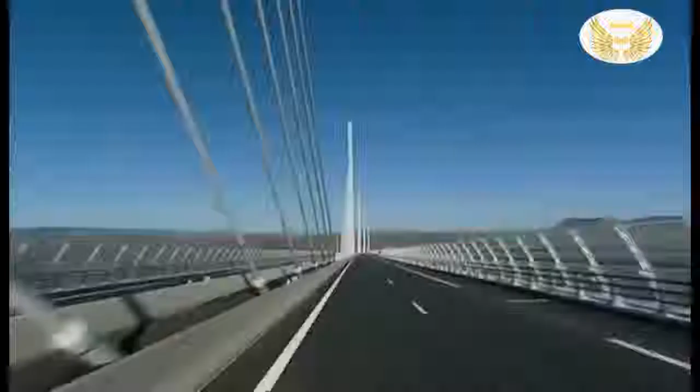This is the Millau Viaduct, the tallest bridge in the world. Its highest tower stretches a staggering 343 meters. So high, the bridge glides above the clouds. But this is a megastructure they said couldn't be built. When I've shown first the drawing of this bridge, they really thought I was crazy.

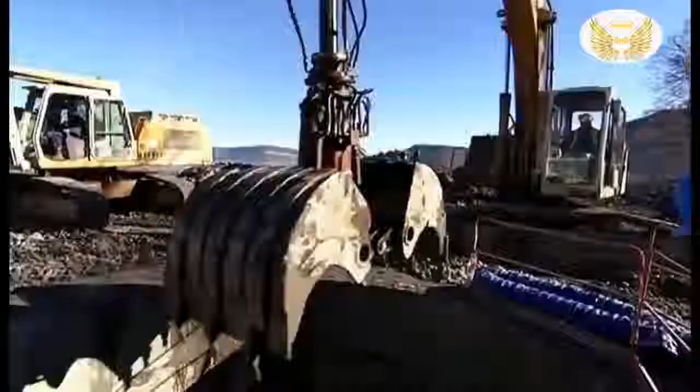The team attempting to build this amazing freeway in the sky had to survive landslides, fight winds gusting at 130 kilometers an hour, and weather massive storms as the bridge simply hung in the balance. It's a bridge that pushes the boundaries of engineering to the limits, and then beyond.

Imagine building a series of Eiffel Towers, then slinging a 4-lane highway between them, all the way across one of the deepest valleys in France. Impossible though it sounds, that pretty much describes the building of the Millau Viaduct.

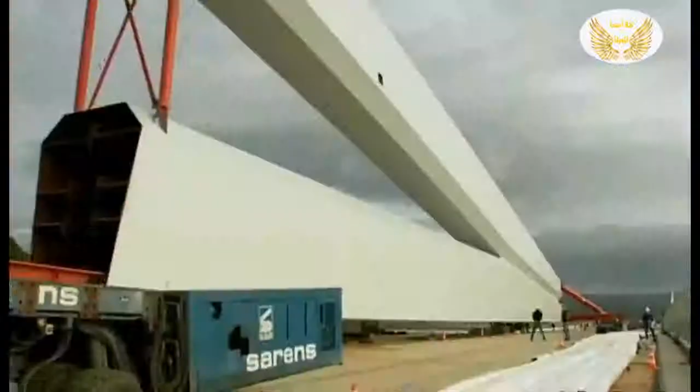From the start, the construction team faced 3 daunting challenges. 1. Build the tallest bridge piers in the world. 2. Put a 36,000-ton freeway on top of them. And 3. Erect 7 steel pylons, each weighing 700 tons.

And what's more, they had to do this hundreds of meters above solid ground. So high that if you were on top of the Eiffel Tower, you'd still be looking up at this awesome bridge.

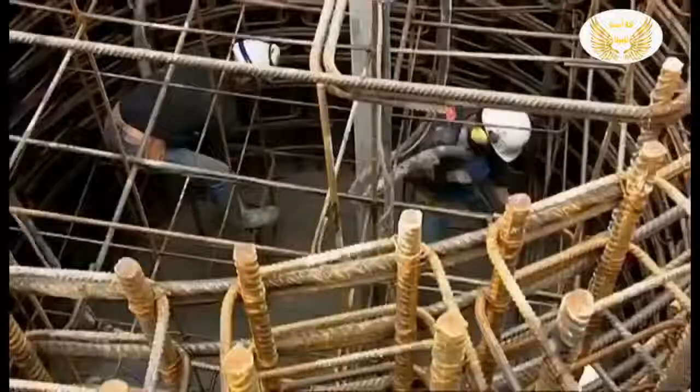October 2001, the team break ground. They're required to build a bridge that'll last for 120 years. And to win the contract, the teams promised to build it in record time, less than 4 years. By comparison, the world's longest suspension bridge, the Akashi Kaikyo in Japan, took a full 10 years to build.

To up the ante, any delay will cost them $30,000 a day in penalties. There are 7 piers that are numbered from the northern end of the valley. Number 1 will pose problems because of the steep slope. Number 2 will be the biggest challenge since it's the tallest. Crossing the river, number 3 is not much shorter. Then 4, 5, 6, and 7 climb the gentler slope to the south.

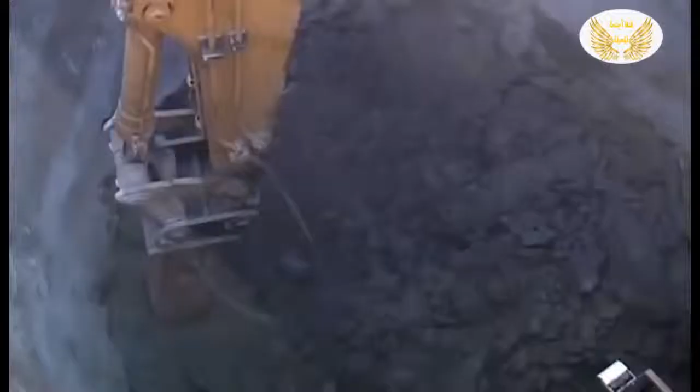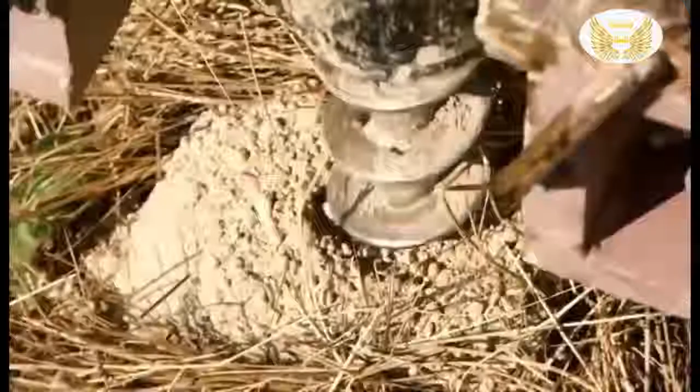To begin, the team had to bury the foundations deep in the bedrock in order to support the enormous weight the bridge will place on them. But the forces of nature were stacked against them. Geologists have warned of the risks posed by the region's fractured limestone. The rock is full of cavities that are essential to the local cheese economy.

These cave systems, close to Millau, are home to a unique bacteria responsible for the blue mold in the world-famous Roquefort cheese. But what's perfect for cheese could be disastrous for a megastructure. The geologist's diagnosis spelt one thing: landslides. This kind of catastrophe could jeopardize the entire project. Despite the warnings, building went ahead as planned.

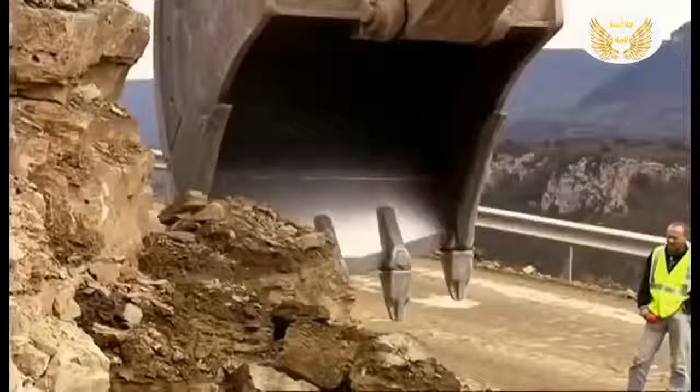Then, well into construction, as predicted, a dramatic storm causes a landslide. 4,000 cubic meters of rock collapse around Pier 1. Fortunately, the fallen rock doesn't damage the pier, but the warning is clear. They're forced to divert precious manpower and equipment to stabilize the slope and prevent a repeat collapse.

So if the area is prone to landslides, why did they build the world's tallest bridge here in the first place? The answer is simple. In the 1980s, France built a freeway linking Paris directly with Spain. This major artery headed south across the French countryside, while from the Mediterranean, the freeway headed north, until they both hit one of the deepest valleys in France and stopped dead.

Welcome to Millau, France's least favorite bottleneck. The town of Millau is in the mountainous region of the Massif Central, one of the most tranquil parts of France. But in summer, this poor medieval town suffered traffic hell. The locals couldn't take it anymore. Neither could their mayor. It was terrible for our reputation. When you hear every day on the television and radio, avoid Millau, there's a traffic backup, a 5-hour wait in Millau.

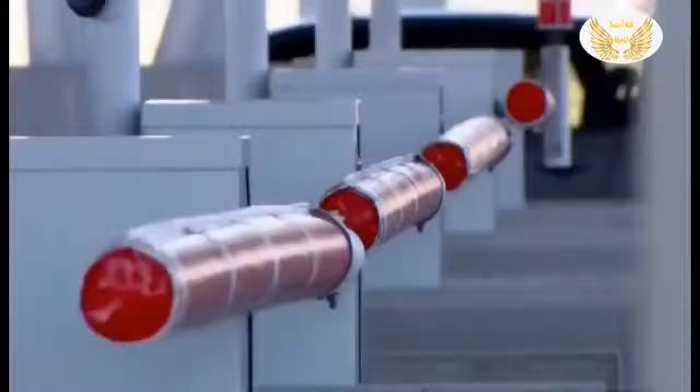Car 22 then has the long haul up the other side of the valley. The final timing is a staggering 1 hour and 35 minutes. Over an hour longer than Jamila, who took the freeway and bridge. It's clear exactly why the bridge was needed, but it took the French government a very long time to get round to building it.

12 years before construction began, up in Paris, the Ministry of Transport first came up with a plan. Their head bridge builder, Michel Virlogeux, is no ordinary engineer. He's a man who thinks big, very big, like the Normandy Bridge in northern France, the longest cable-stayed span in the world. With this record-breaking structure completed, Virlogeux was on to his next, Millau. His plan, another cable-stay bridge, but pushing the technology beyond anything previously attempted, with piers 4 times higher than the Normandy Bridge.

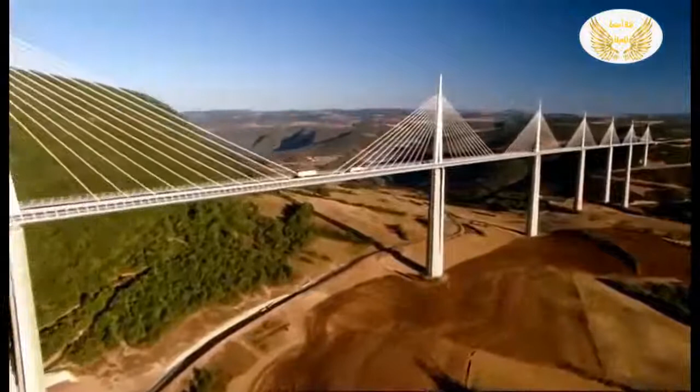The Millau Bridge would not only be the world's tallest, it would be unlike any bridge ever constructed. When I first showed the drawing of this bridge to the government authorities, they really thought I was crazy. Virlogeux's Normandy Bridge has 2 sets of cables supporting the deck. But he wanted to up the stakes for Millau by losing 1 row of cables, so the remaining line would be forced to do twice the work.

More dramatically, the 2.5-kilometer Millau Bridge, instead of having a single main span, needed a whole series of piers to support it across the valley. No bridge builders had ever attempted a multiple-span, single-line cable-stay bridge on this scale before. The French authorities had a problem. Nervous about Virlogeux's groundbreaking scheme, they held a competition inviting other engineers and architects to compete with different designs.

The winner, Lord Norman Foster, is one of the world's superstar architects. In Hong Kong, he built the world's largest airport terminal. In Barcelona, offices literally hang from a mast on his communications tower. This is a man who regularly contemplates the impossible and delivers. You know, it's the challenges, and it's one challenge on top of another, on top of another.

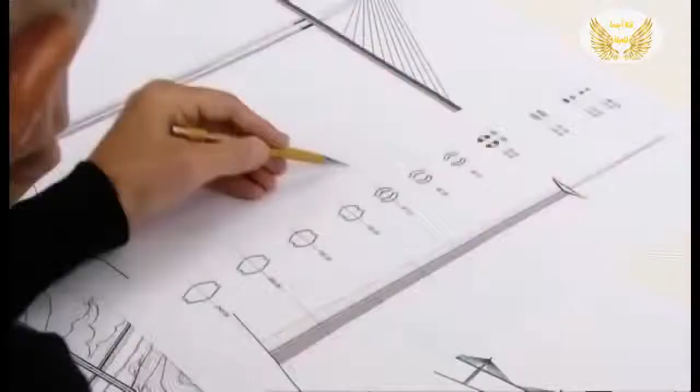Ironically, Foster's answer was to take Virlogeux's pioneering scheme, then push it one stage further. He turned an elegant piece of engineering into a delicate work of art by boldly cutting out 2 of the 9 original piers and seriously slimming down the remaining piers and road deck. Foster wanted the bridge to appear as delicate as a butterfly, but this butterfly has to support the weight of 5 Eiffel Towers in gale-force winds hundreds of meters above the River Tarn. Getting the design wrong would be a disaster.

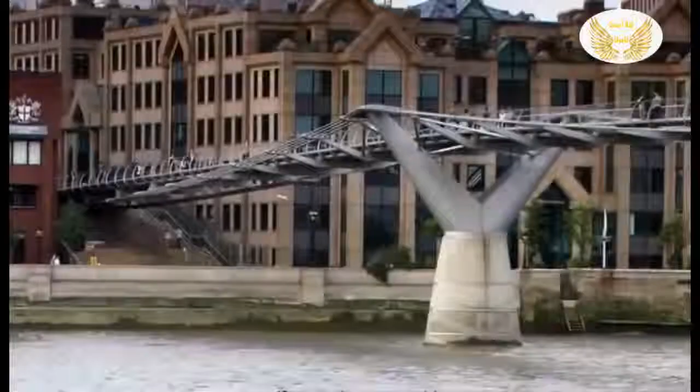Then, with Millau still on the drawing board, Foster's record as a bridge builder suffered a major setback. His Millennium Bridge in London is actually another record-breaking structure, the lowest profile suspension bridge in the world. But when this footbridge opened to the public in June 2000, it was a public relations disaster. Crowds walking over it set up a resonant frequency, and the bridge began to sway. As people adjusted their step to the small initial wobble, the effect was magnified.

Though it didn't threaten the structure, the swinging motion became so dramatic, the authorities closed the bridge for a refit that took 1.5 years and ended up costing over $8 million. It was a bad omen for the Millau Bridge, where construction was soon to begin. And at 15 times the height, a design flaw would be a catastrophe.

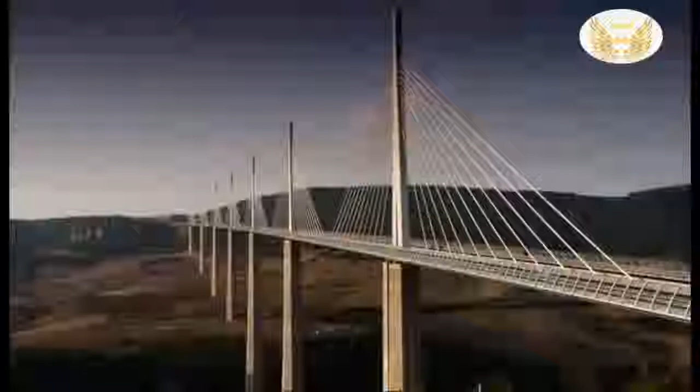December 2001, France's Millau Viaduct, the tallest bridge in the world, is under construction. Everything about this project is supersized. It'll need 200,000 tons of concrete, so much that the team have to build a concrete factory on site. But there's nothing straightforward about this concrete. The formula must be just right. It needs structural strength to support the massive loads it'll have to bear.

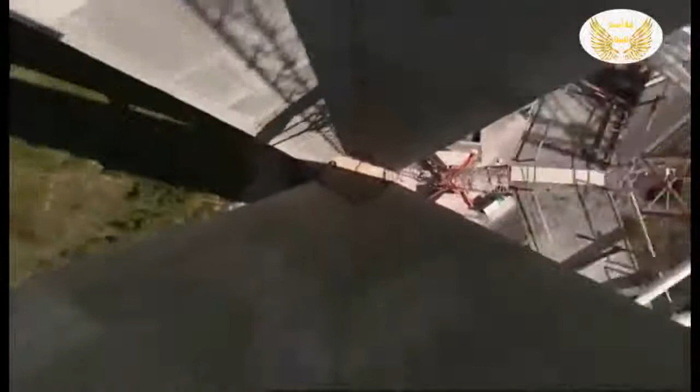But it can't set too quickly, as it has to be hoisted into position and poured hundreds of meters in the air. And it needs to be just the right color to suit Norman Foster's vision. In fact, the architect's vision has created a headache for the construction team. He's designed each pier as a complicated geometric shape, tapering the entire way up with vertical grooves set into them to create shadows. But what's just a line on paper for the architect was a major challenge to build.

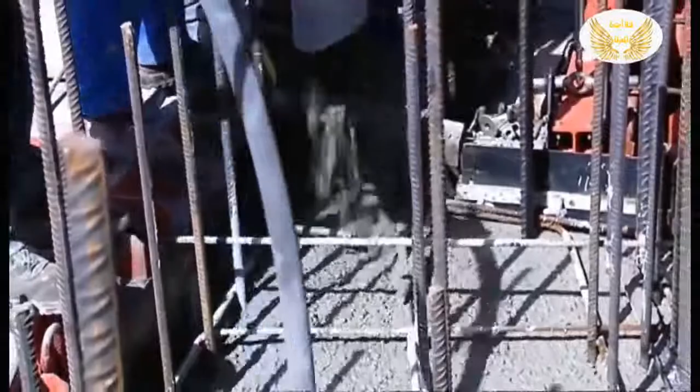The enormous piers are built step by step by pouring concrete into a temporary mold. To give the required strength, the molds are filled with a frame of steel reinforcing bars. In total, 16,000 tons of these steel bars are hoisted into place and secured. Laid end to end, they'd stretch the 4,000 kilometers from Millau all the way to Central Africa.

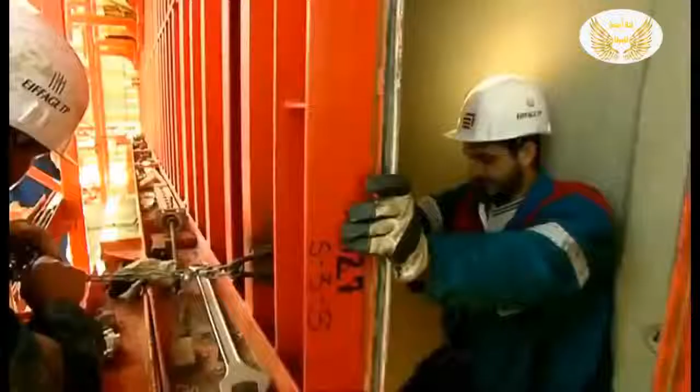The shape of each pier is seriously complicated. As a result, each time they remove the sections of red steel shuttering, they have to change the shape of the mold to fit the profile of the next 4-meter section. Manhandling these steel panels weighing up to 15 tons apiece is no picnic. And with the combined height of the 7 piers totaling well over a kilometer, they have to change the shape of the mold over 250 times.

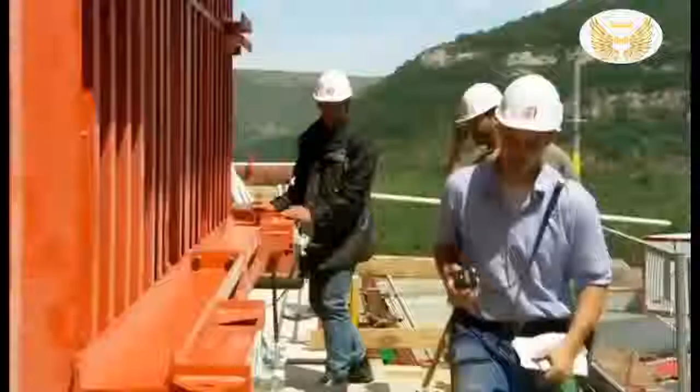Every 3 days, each team on each pier went through this whole cycle. Then they repeated the process. But it was a race against time, with a permanent threat of delay. Keeping the entire build on time and to budget was the daunting responsibility of one man, Jean-Pierre Martin. If instead of 3 days we took 4, imagine that multiplied by the number of castings. We'd end up with a 3 to 6 month delay. With a penalty of nearly $1 million a month, this isn't something Martin wanted to contemplate.

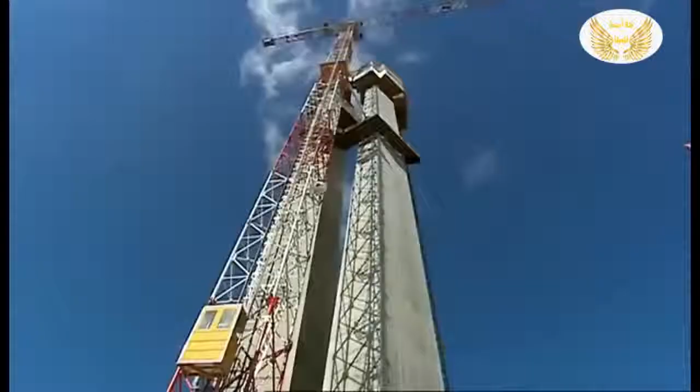And this schedule wasn't his only headache. You have to be pinpoint accurate when you're building the tallest bridge piers in the world. Get it wrong, and the bridge simply won't fit together. Just 10 centimeters out, about a hand's width on each 4-meter section, and the tallest pier could be 6 meters off at the top, the width of a jumbo jet fuselage.

Each team was aiming for a specific point in the sky. For Pier 2, this was exactly 245 meters above the ground, 546 meters from the north side, and 1,914 meters from the southern end. There was no room for error. The only chance they had to get it right was with GPS, accurate to within 4 millimeters. Using signals from multiple satellites, the team could pinpoint their position and make sure they're on target for that critical point in the sky they needed to hit.

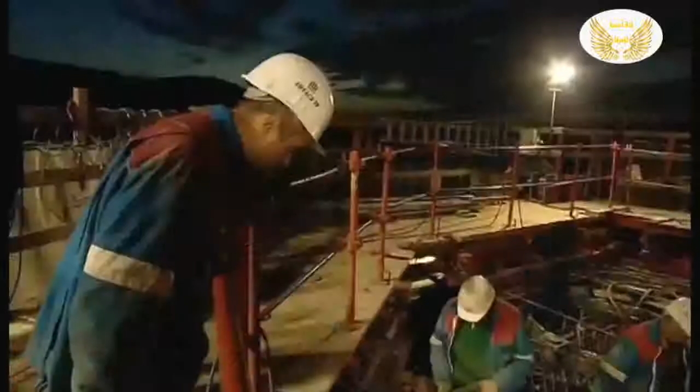Month after month, the piers climbed higher. Finally, by November 2003, they reached their full height. At 245 meters, Pier 2 becomes the highest bridge pier in the world. But is this record-breaking pillar where it's supposed to be? Amazingly, it's dead on target, to within 2 centimeters. Champagne corks pop. It's time for a major celebration. Against all the odds, they were 1 month ahead of schedule, but the team couldn't afford to relax. The next stage of the project would be the most difficult part of the build.

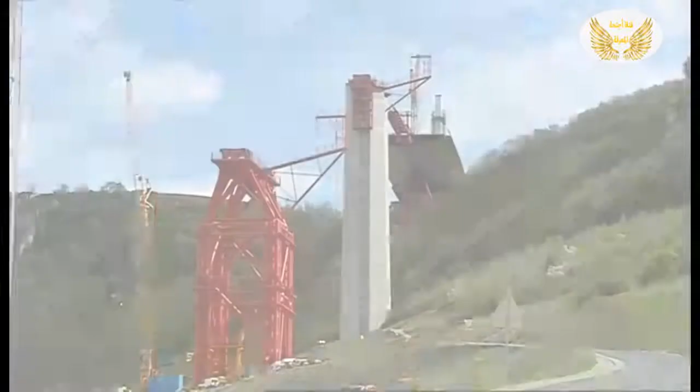Phase 2 of building the world's tallest bridge involved putting a 2.5-kilometer roadway weighing 36,000 tons on top of the piers, a full 270 meters above the River Tarn. Bridge builders know danger comes with the territory, but working at these heights can be lethal. More than 34 died constructing New York's Brooklyn Bridge. 35 died in 1970 on the Westgate Bridge in Melbourne, Australia. And 1 year later, 13 workers were killed when the Koblenz Bridge in Germany collapsed into the Rhine.

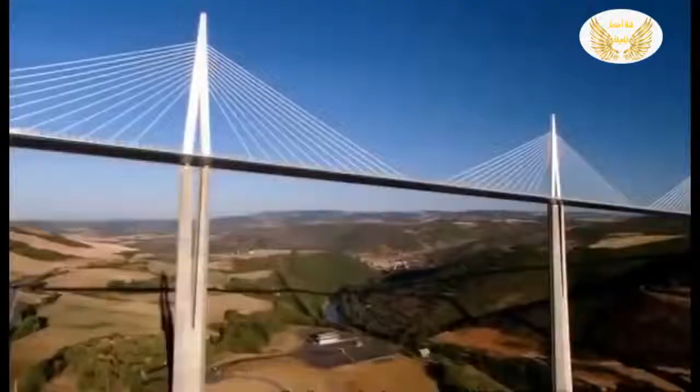With these fatalities in mind, the team decided to fabricate the entire road deck on the safety of solid ground. This meant building it in steel, which in theory would be much safer than lifting vast concrete sections hundreds of meters into position. There's only one problem with this plan. No one had ever put a road deck on piers anything like this height before, let alone over a 2.5-kilometer span.

In the end, only one steel manufacturer had the courage to take on this colossal challenge: Eiffel, the steel firm set up by the great French engineer. Eiffel built what was once the tallest bridge in the world, the Garabit Viaduct in southern France, before getting round to the framing for New York's Statue of Liberty and, of course, his signature tower in Paris. But despite the company's experience, Eiffel's director, Marc Buonomo, knew he was taking a serious risk. It was a gamble for the company, because if there had been a mistake, if it hadn't worked, it would have been the whole company.

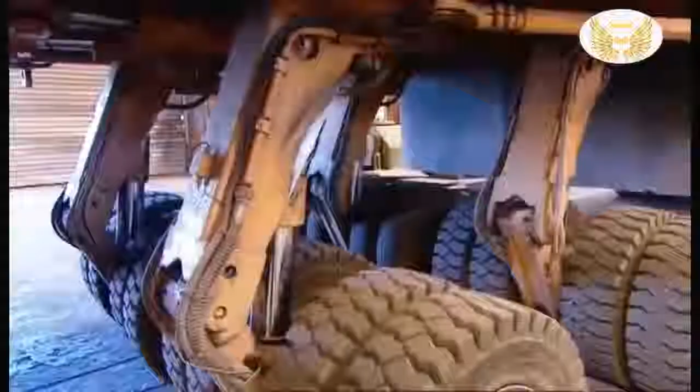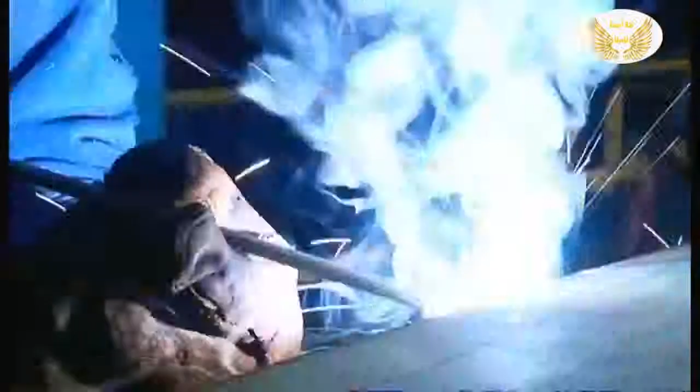They fabricated the massive sections that would make up the road deck in the company's steel factories. This immense jigsaw puzzle involved manufacturing 2,200 separate sections, weighing up to 90 tons and some of them 22 meters long. Their accuracy is measured with a laser to within a fraction of a millimeter. The huge square tubes are the central spine that should make the deck rigid. The triangular side panels will be welded on either side to create the width for a 4-lane highway.

To meet the punishing schedule, Buonomo automated the manufacturing with a 2-headed welding robot and a plasma cutting machine. Each cutting pattern or template is programmed into the computer. Then the machine automatically blazes its way through the steel. The torch reaches a scorching 28,000 degrees centigrade. That's 5 times the temperature of the Earth's inner core.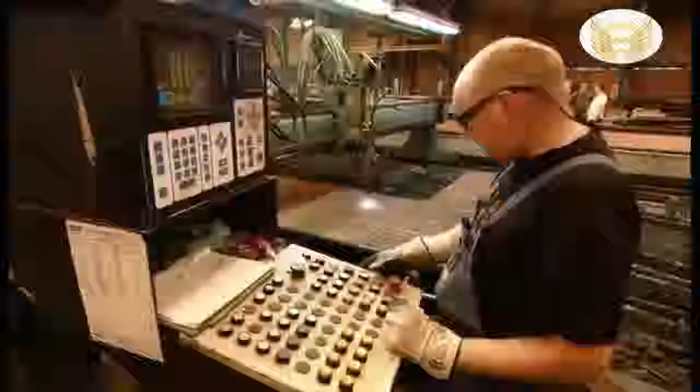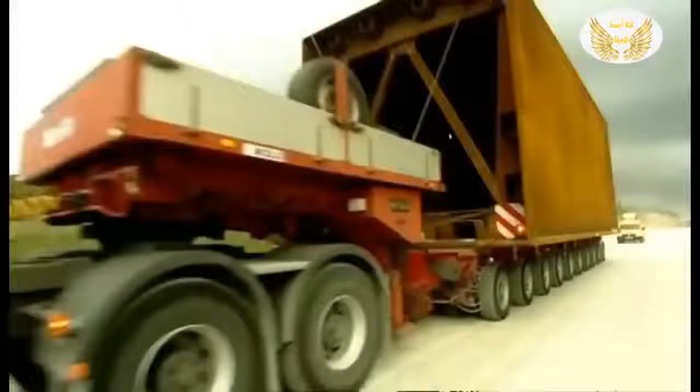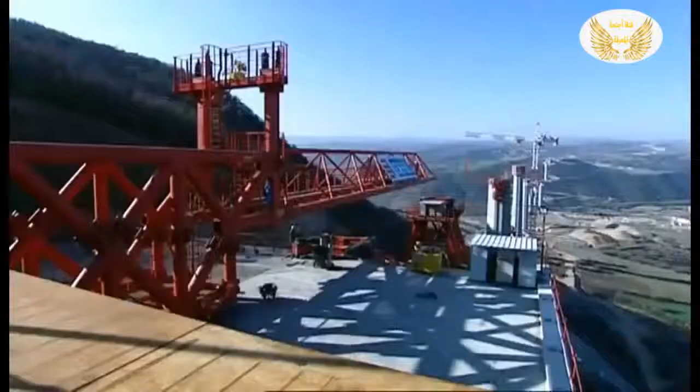Extraordinary road convoys. The components arrived at assembly plants set up, one on either side of the valley. Here, the pieces of a massive jigsaw puzzle were welded together to form the 2 halves of the deck. But getting these 2 halves to span the valley on top of the world's tallest bridge piers would be a major challenge. They'd be the first team to put a road deck on a pier taller than an 80-story skyscraper.

And pushing bridge building beyond anything attempted before, they planned to slide the entire 2.5-kilometer road deck over in 2 colossal pieces. The bridge's chief engineer, Jean-Marie Kremer, was one of the few people who believed it could be done. All the engineers who know this method, who were in the know, didn't believe it was possible. If the team had got their calculations wrong, the entire structure could collapse into the valley.

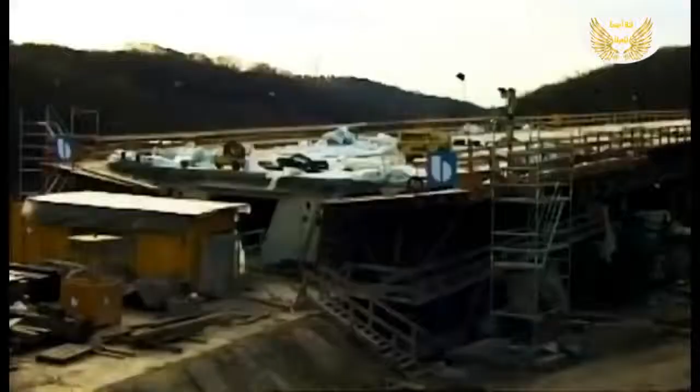We found a solution for the construction, which was to launch the bridge from the 2 sides. One part on the Larzac Plateau, one on the Rouge Plateau. And to push them from the 2 sides and to make them come and meet here above the River Tarn. Smaller bridges use a similar technique. A powerful set of hydraulic rams literally pumps the deck from one side to the other. But Millau would be the longest launch ever attempted over the highest piers in the world, and the results could spell disaster.

The deck is so slender, it would bend and collapse if it were pushed out over the 342-meter spans between each pier. The furthest anyone's previously managed is less than half that distance. The first part of the solution was simple. Fit a pylon so its cables support the front of the deck as it goes out over the valley. Then construct temporary steel support towers that halve the spans to a more manageable 171 meters.

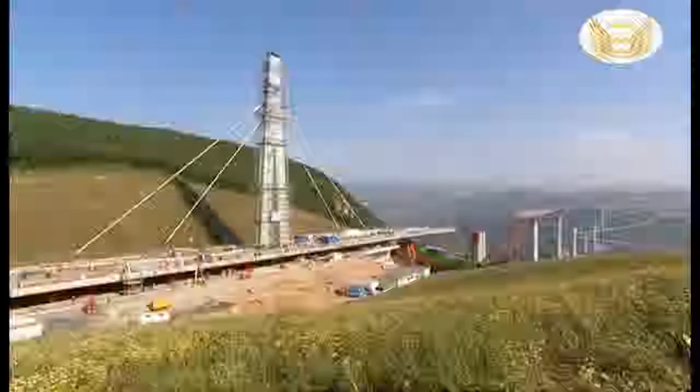These steel towers were a construction feat in themselves. The largest, over 170 meters high, is the tallest ever built, and they needed to carry a massive load: 7,000 tons as the leading edge of the deck, together with the first 90-meter pylon, slide over. And simply pushing this enormous weight over the top of the vulnerable piers would bring them crashing to the ground. This was the nightmare scenario. If we'd done a conventional launch, we would have knocked the piers over like the pins in a bowling alley.

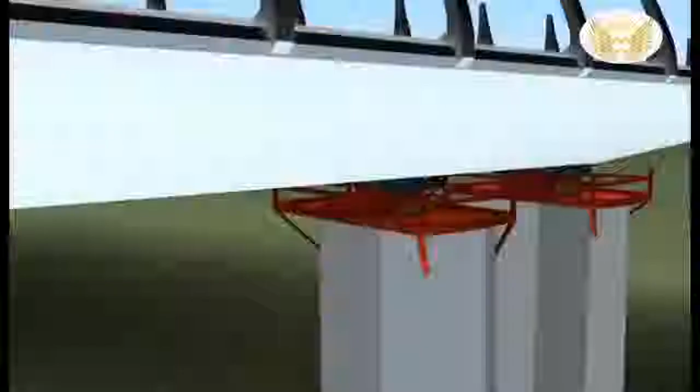The idea is to install a launching system on top of the pier, and that way, if I push the deck, it has no effect on the stability of the piers, and the piers won't fall over. The trick is to use a series of these launching systems to jack up the deck and inch it forward.

Each system uses two wedge-shaped blocks under each side of the deck. The upper wedge is pulled forward by a hydraulic ram. It slides up the slope of the lower wedge at the same time, lifting the deck from its supports and advancing it 600 millimeters. The lower wedge then retracts, dropping the deck onto its supports. The upper wedge returns to its original position, and the whole cycle begins again.

4 of these clever devices are placed on each pier, all programmed to work at exactly the same time. The result is that together, they pick up the entire roadway and shunt it forward. But if one fails or gets out of step, it could spell disaster. The force could push the bridge piers apart till they collapse.

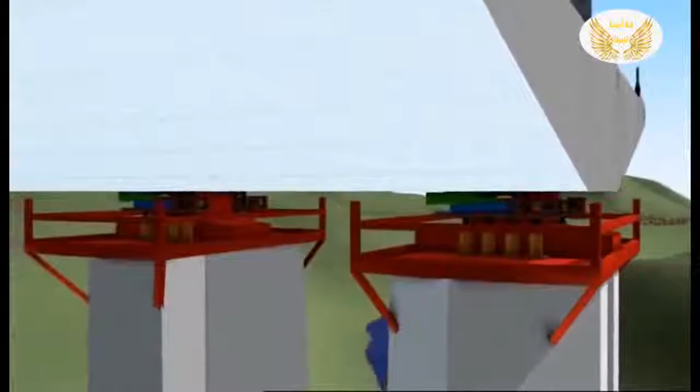When you're up there and you see Millau 300 meters below you, you ask yourself, was this a good idea? The future of the entire project was now hanging on a prototype, and it had never been tested.

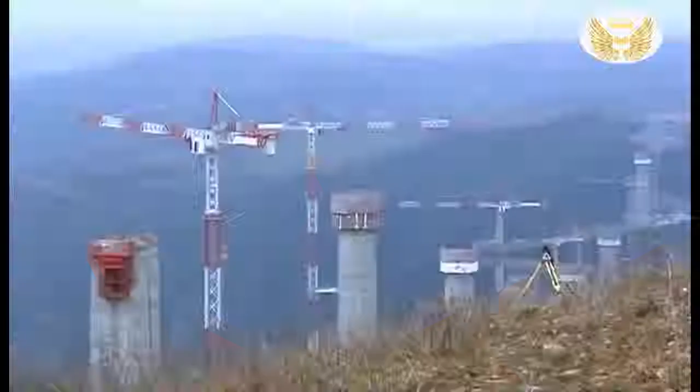It's the morning of February 26, 2003. Do or die day for the world's tallest bridge. Everything is about to be put to the test. The flexibility of the deck, the strength of the temporary piers, and critically, the pioneering hydraulic ram system. Even Buonomo, the man in charge of the launch, had his doubts. As it had never been done before, I have to tell you, I had fears that it wouldn't work.

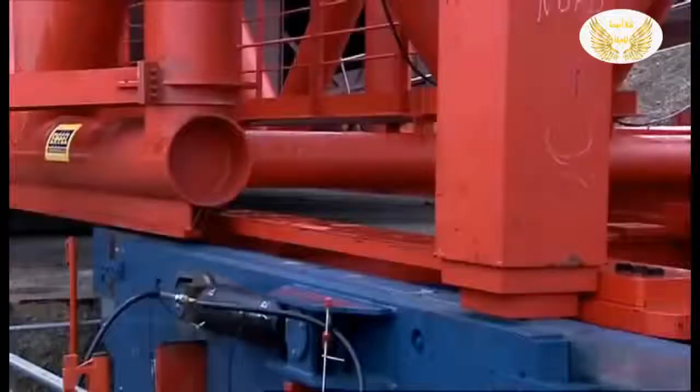The pumps kick in, the pistons start to push, and the deck begins its huge journey across the valley. The moment I heard the motors start, I put my finger on the deck, and I could feel my finger move.

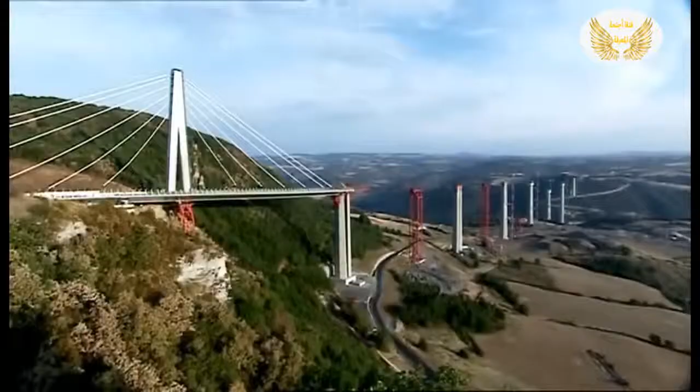Every 4 minutes, the deck advanced 600 millimeters across the valley. Surveyors tracked its progress. But it was still a nail-biting time as they watched the unsupported deck crossing the void. Eventually, the deck reached the safety of the first pier. 204 meters down, only 2,256 to go. The launching system seemed to be working as planned. The engineers were feeling optimistic.

But as the deck advances into space, it'll become more vulnerable to the wind, which can reach 130 kilometers an hour. Unfortunately, the road deck has the shape of an upside-down airplane wing, and the team's greatest fear is that this wing could simply take off. The engineers kept a close eye on the wind and weather conditions. When they were satisfied there was a 3-day weather window and the wind wouldn't exceed 85 kilometers an hour, they'd give the construction team the go-ahead, and the deck launch could continue.

The reason for this precaution is simple. Strong winds can literally tear a bridge apart. In 1940, Washington State built a suspension bridge across the Tacoma Narrows in the US Northwest. It opened with a grand ceremony on July the 1st. But the celebrations were short-lived. The bridge had a major problem: the wind.

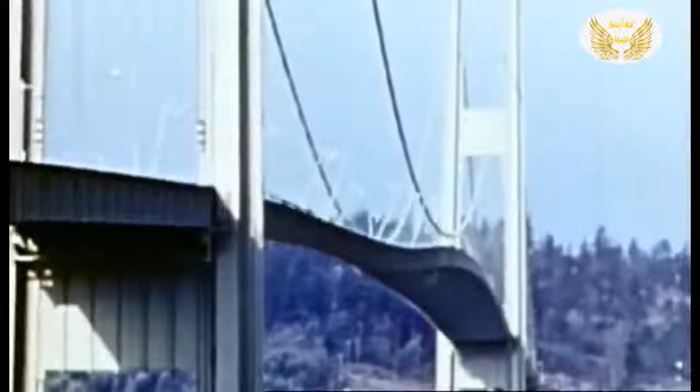Girders beneath the deck, designed to make the bridge rigid, actually blocked the wind, causing the roadway to ripple alarmingly. Locals soon dubbed it Galloping Gertie. On the 7th of November, with the wind less than 70 kilometers an hour, the bridge begins to twist violently. At 11 a.m., time runs out for Galloping Gertie. The wind sends the bridge crashing into the river.

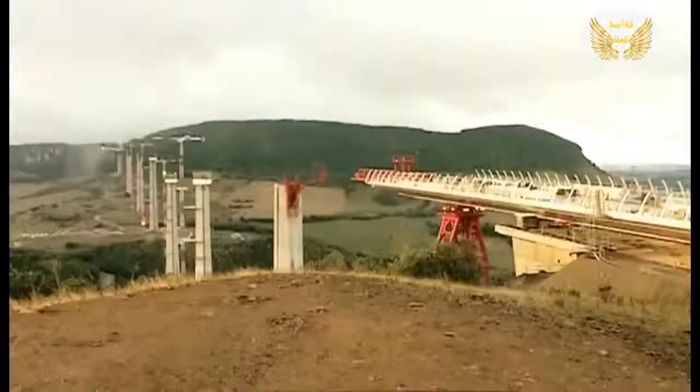Wind tunnel testing is now standard procedure as a direct result of Galloping Gertie. For the Millau Bridge, they analyzed the wind in the Tarn Valley over 18 months, then recreated those conditions in the wind tunnel. Wind engineer Olivier Flamand was shocked by the results. The average wind speed was relatively low, but because there's such strong turbulence, it created very fast peak winds. The rugged terrain creates serious turbulence at the height of the road deck. Winds peak at 130 kilometers per hour. That's hurricane force.

They tested every aspect of the bridge to analyze the risks: piers, pylons, and critically the deck. But it's not just the aerodynamics of the finished bridge. They needed to find out how it would behave when it was most at risk, during the launching of the deck.

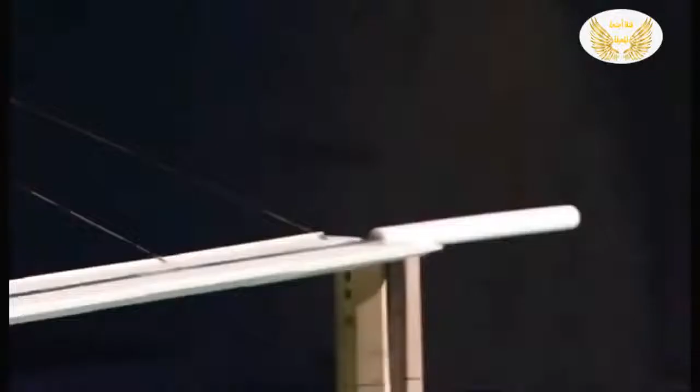Olivier and his team reached a chilling conclusion. The winds they've measured are strong enough to blow the unsecured deck off its supports and send it crashing hundreds of feet to the valley floor. And then the nightmare began. On the 22nd of August 2003, 6 months into the deck launch, one of the launch systems failed, leaving the deck hanging in the wind. To make matters worse, the weathermen were predicting storms.

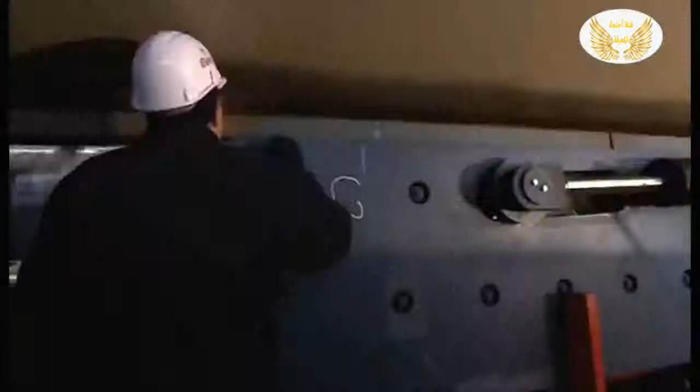So far, these massive pumping machines had worked perfectly. But the fact is they were prototypes, and due to the frantic schedule, they'd never been tested. The problem was that the non-stick Teflon between the sliding surfaces had ripped, and the friction generated was too much for the hydraulic rams to push against. Unfortunately, no one had planned on replacing parts of this monster machine mid-launch on the top of a massive concrete pillar. This was very bad news for the man who staked his reputation on this system.

It was maximum stress, like poison in your mouth. You don't forget that. Re-examining their calculations, they realized the cause of the problem. They'd underestimated the forces between sliding surfaces, but they wouldn't be able to repair it without the necessary spare parts. The clock was ticking, and Marc Buonomo needed a solution fast.

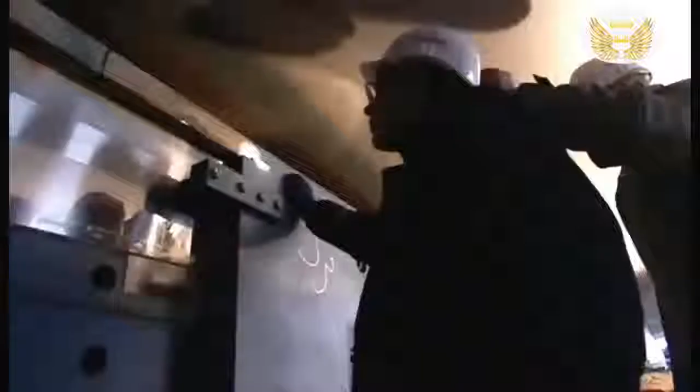When Apollo 13 came back with that incident, the NASA engineers requested they did the inventory of everything there was on board to know how to fix it. The Millau team did an inventory. They realized that the other launching machines, not yet being used, could be stripped to provide the new Teflon surfaces they needed. Working all through the night, the team extended the access platform. This allowed them to take out the 5-meter-long, 2-ton steel wedges, replace the Teflon, and reassemble the launching machine. By 8 a.m. the next morning, it was ready to resume the launch.

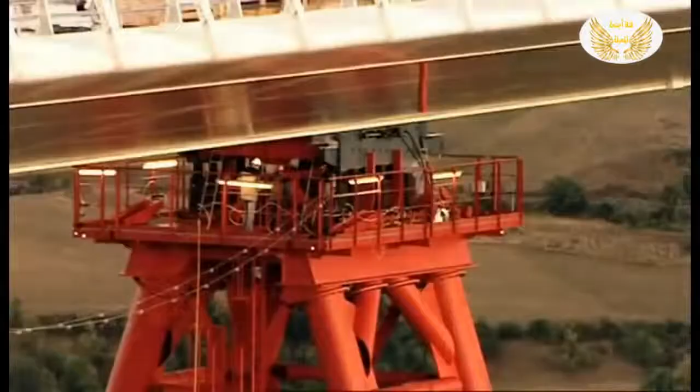The rest of the week, the predicted storms arrived, and another set of launching machines wore out. So when the deck finally made it to the safety of the next pier, the team breathed a major sigh of relief. You don't forget that. I won't forget that for 4 hours I was really scared.

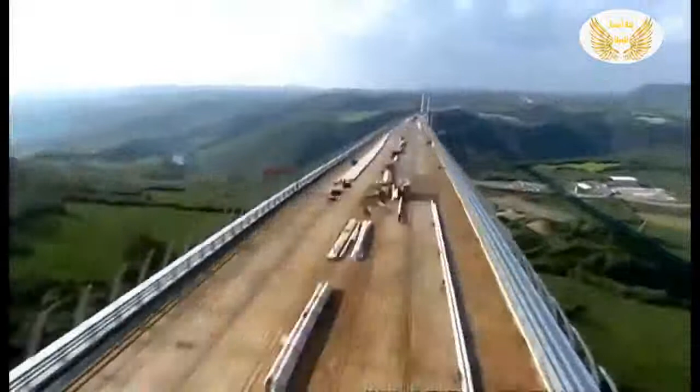The two decks continued their journey across the valley. Day after day, week after week for a full 14 months, they approached each other, millimeter by millimeter. By May 2004, they'd reached a critical phase. From the northern end, the shorter deck had traveled 717 meters into space to reach its final resting place. From the south, the longer deck extended over 1.5 kilometers. Only the section over the river, the one point where it was impossible to erect a temporary pier, divided them.

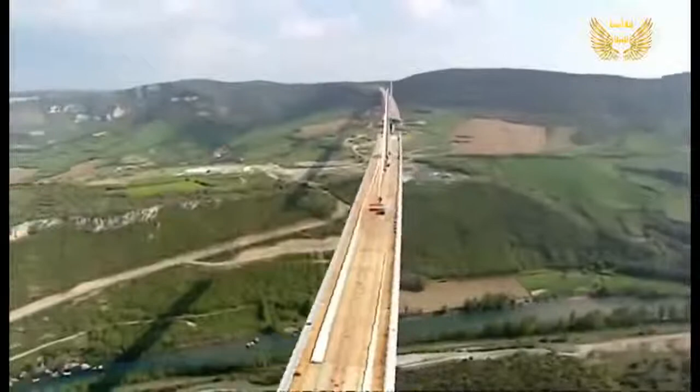If they've got their calculations wrong, they'll have built the biggest white elephant in Europe. Even the man behind the whole project had his doubts. I was not convinced at all that the two parts of the deck could meet exactly with a perfect geometry. The odds were against them. Calculating such a feat so precisely is a Herculean task.

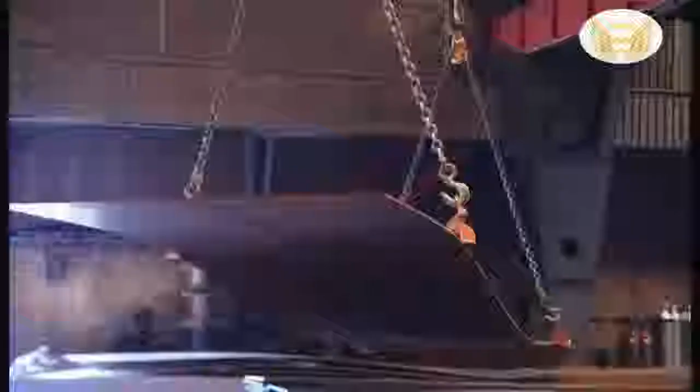Firstly, the two starting points on the northern and southern slopes of the valley are at different heights. Secondly, the bridge has a subtle curve to it. As a result, each steel panel which makes up the road deck had to be cut and welded with extreme precision. It would be an engineering triumph if they got these two sloping curved decks to meet as required. The team checked the weather reports. With the wind inside safety limits, they gave the go-ahead for the final push.

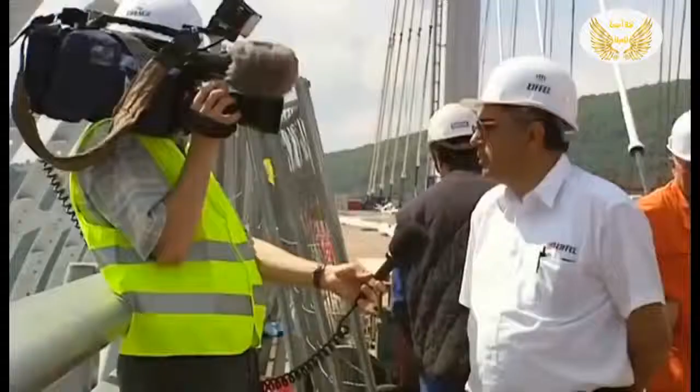The rams began to drive the deck's leading edge off the safety of Pier 3 towards its destination. At this point, a total of 21 launching systems needed to move at exactly the same moment to avoid disaster. If anything were to go wrong now, the man responsible would be Marc Buonomo. Everyone asked me, how can you be sure that it will go straight? So to be sure that they were going to the right place, I had a GPS put on the front, so I could see the gap between the theoretical and the real position.

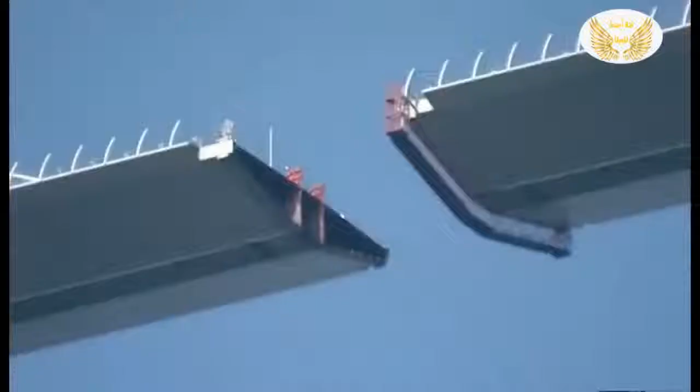Over the next 2 days and nights, the deck advances 600 millimeters at a time towards its final resting place. The world's media are watching the critical meeting of the decks. And to add to the pressure, the French Prime Minister is due to drop in to celebrate the event. The deck pushes forward, now with only centimeters separating the two sections. A magnum of champagne is hung between them to mark the moment.

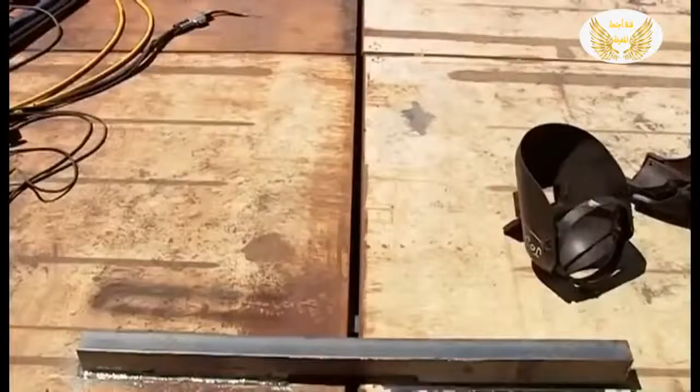At last, union. The two massive steel decks have traveled high over this valley, a total of 2.5 kilometers, and when they check, they're aligned to within 1 centimeter. That's accurate to within 99.9999%. All the measuring, all the calculations have paid off. They've nailed it.

The meeting of the decks was a special moment. News reports traveled round the world, and in Salzburg, Austria, they reached Felix Baumgartner, aka Felix the Conqueror. Felix has made a career base jumping from some of the tallest structures on the planet, and within 24 hours, he'd driven to Millau and was calculating the logistics for the jump, factoring in his two main aims, to avoid arrest and death.

Baumgartner waited for darkness before arriving on site. He found his way to the base of Pier 2, then climbed an access ladder the full 245 meters to the top. He entered the steel road deck and found a place to hide until daybreak. He had to remain concealed until the sun was high enough for his cameramen to record his world record attempt.

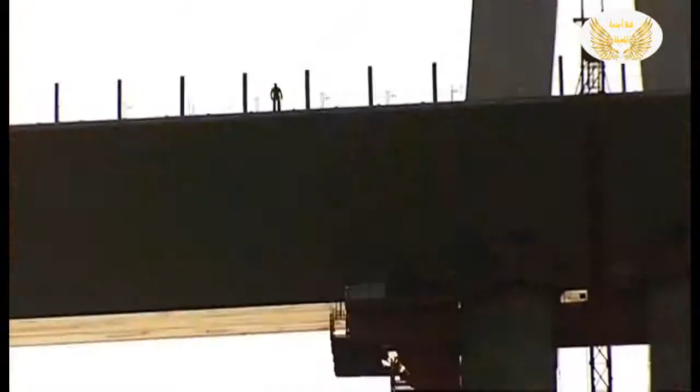At 7 a.m. the following morning, Felix the Conqueror emerged. He took a cool backward flip off the tallest bridge in the world and entered the record books. The tallest bridge in the world, 250 meters. I did it. And having evaded death, he made sure he's not caught by the police.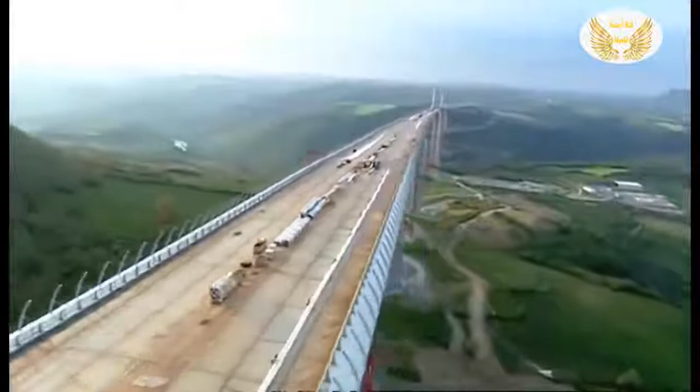The decks have been joined, and the team have reached the final phase of the project. But there was still a race to meet the schedule, and their problems weren't over yet. Everyone could see the dramatic undulations in the flexible steel deck. Even some hardened bridge builders wondered about its structural integrity. It was a huge surprise for everyone. All the engineers said, we knew steel was flexible, but not that flexible.

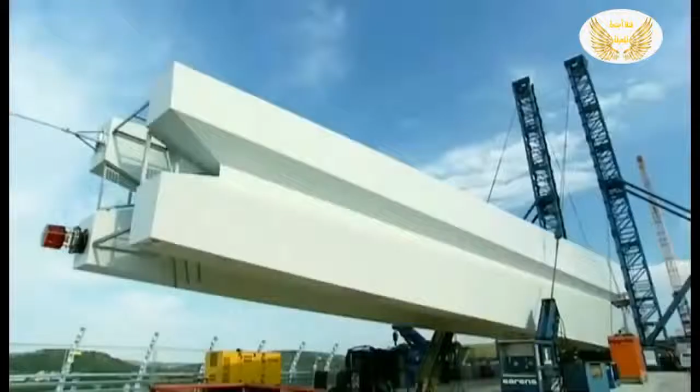The team were relying on the pylons and cables to pull the deck straight. Each massive pylon is 90 meters high and weighs 700 tons, the equivalent of 85 London buses. Placing them in position on the slender deck, high above the valley floor, would go beyond anything ever attempted. Once again, Marc Buonomo had a plan. You know, the first people to make vertical pylons were the Egyptians. Buonomo adapted a technique used in ancient Egypt to erect obelisks in the sands.

On top of the road deck, the team put up two enormous steel towers, both of them secured by cables and equipped with a hydraulic system capable of raising 1,000 tons. The 700-ton pylon is then lifted by the hydraulics. As it rises, it pivots little by little until it's vertical. It's then lowered safely onto its anchorage point. Buonomo's 4,000-year-old technique worked to perfection.

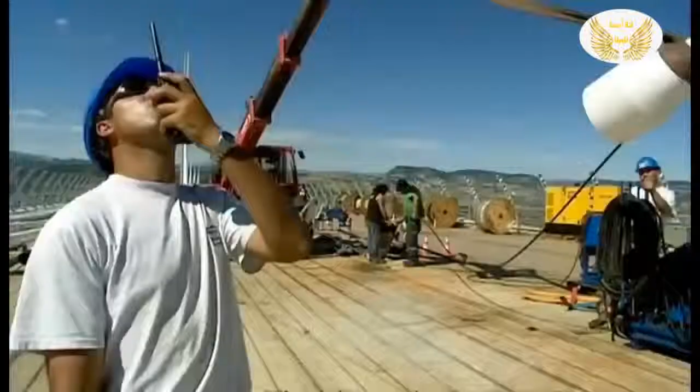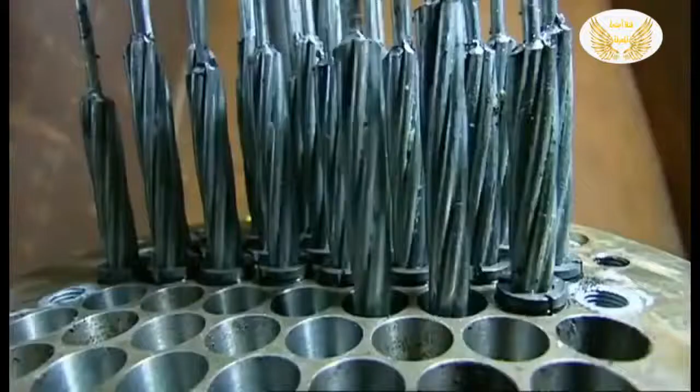With all 7 pylons in place, the team could attach the cable stays that would straighten the rippling deck and give it the strength to cope with full traffic loads. They hoped. The weight of the roadway is now over 40,000 tons, the equivalent of a cruise ship, and the 154 cable stays should prevent it from sagging or collapsing. The strongest stays are made up of 91 individual steel strands and have a breaking strength of 25,000 tons, strong enough to hold back 25 jumbo jets, all at full throttle.

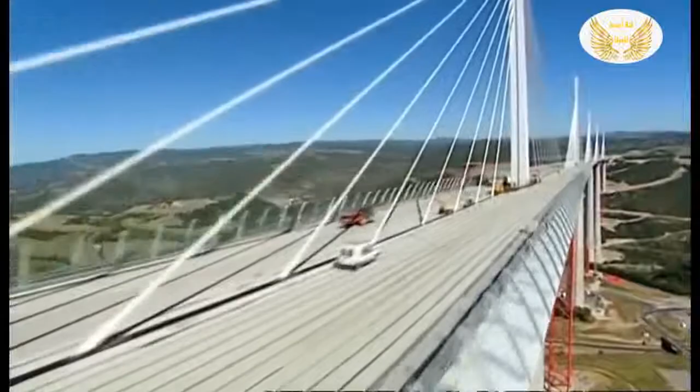As the cable stays are tensioned, true to plan, the ripples in the road deck are pulled straight. Over the 2.5-kilometer deck, the ripples are now no larger than the size of a thumb. They're finally on the home straight. The road surface goes on, adding a further 10,000 tons to the load. That's like driving 153 battle tanks onto the deck. But before it could open to the public, the team needed to know the bridge is safe. It would have to pass one crucial test.

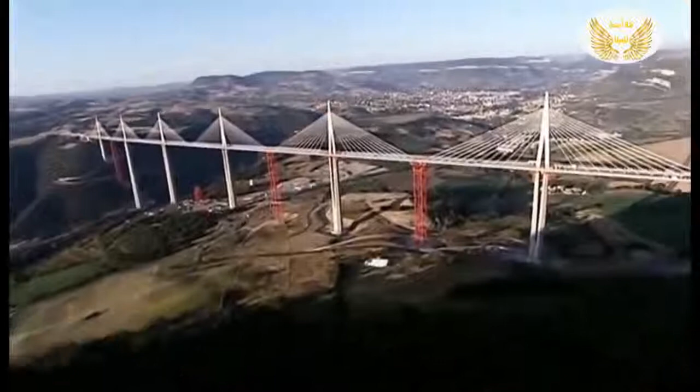After 3 years, the construction team building France's Millau Viaduct, the world's tallest bridge, are about to find out if they got their calculations right. On a single-span cable-stay bridge like the Normandy Bridge, a large load on the main section is no problem because the cables are attached to solid ground and can't give.

On the Millau Viaduct, with its 8 spans, the cables are attached to the deck of the adjacent sections. A load on one section will cause it to drop, pulling the stays down. As the pylons lean in, the matching stays are pulled upwards, lifting the neighboring decks and causing a dangerous rippling effect.

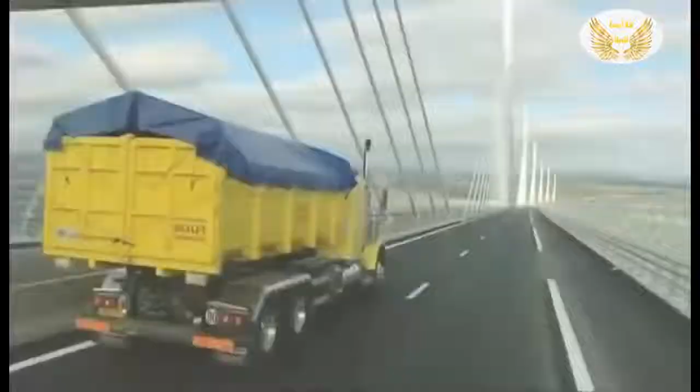It's right now the team put their bridge to the test. These 28 trucks have a combined weight of over 900 tons. They are now positioned in the critical point, mid-span. The engineers hold their breath. Measurements are taken. The span bends just 26 centimeters. This is a triumph for the engineers. The bridge was designed to cope with more than double that.

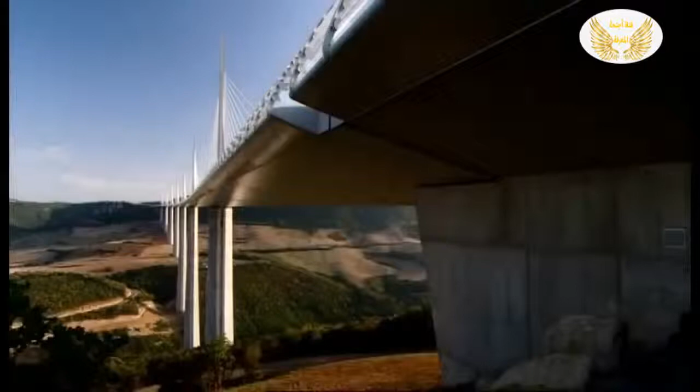4 weeks later, on December the 14th, 2004, President Jacques Chirac officially opened the Millau Bridge. A proud moment for the whole of France. Just over 3 years of construction have produced the tallest bridge in the world, designed to last at least 120 years. And against the odds, the project manager even brought the job in on time. But that's not what he's most proud about. What I remember, because on construction sites there are often accidents, is that we had no serious accidents, nothing more than a minor injury.

As soon as it opened to the public, the bridge was an instant success. But the real test isn't till its first summer, when the French all take their annual vacation. No one ever expected anything like this. Numbers peaked at more than 50,000 vehicles a day. At over $7 per car, that's great news for the construction company, who are clawing back their $478 million investment in the project.

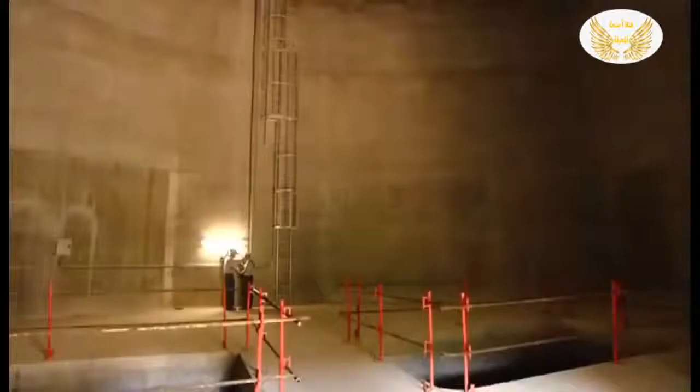This was an epic bridge to build, but it's just as epic to maintain. Thierry and Frank are assigned to P2, the world's tallest bridge pier. This structure is no solid concrete block. It's a series of vast hollow spaces. Their job today is to test the communication system and electric circuits on each of the 7 structural floors. This involves a 343-meter climb, going hand over hand up a ladder for the rest of the day. By dusk, when Thierry finally reaches the summit of the pylon, he may be exhausted, but there is a payoff. You get a fantastic view from here, a 360-degree panorama.

The tallest bridge in the world has become an icon. But this is creating problems no one had ever imagined. Locals have been taking over the bridge as a platform to get media attention for their causes. This crowd was hoping that driving sheep over this freeway in the sky would help them get more farming subsidies. Jose's job is to prevent this kind of incident from creating a danger, and on this bridge, the incidents keep on happening. An alarm triggered by a motion detection system means there's a stopped vehicle on the bridge. Immediately, Jose dispatches a colleague to deal with the situation. The last thing anyone wants is a multi-car pile-up on a 2.5-kilometer bridge, quarter of a kilometer in the sky.

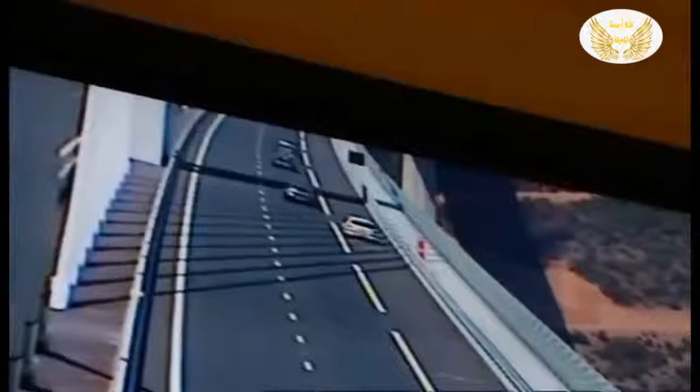Jose zooms in his camera to reveal the man has left his car and is sitting dangerously on the crash barrier. The driver's probably only broken down, but already one man who stopped climbed over the wind barrier and jumped to his death. Bruno intervenes. Thankfully, it's no more than an irresponsible photographer who's sent on his way. You could say the Millau Bridge is a victim of its own success. It's definitely become a major tourist destination. 700,000 visitors in the first 9 months. Fortunately, most of them wait till they're off the bridge to take their photos.

It's magnificent. I came 600 kilometers today to see the Millau Viaduct. There's only one thing to say. It's extraordinary. They're drawn because it's a world-beating structure, but also because it's incredibly beautiful, delicate, and minimal. Not what you'd expect from a structure that's nearly a third taller than any other bridge on the planet. And architect Lord Norman Foster's achieved his aim to give the driver the sensation of soaring. As you leave these plateaus, you do fly. You fly across this bridge. Literally, you are above the clouds.

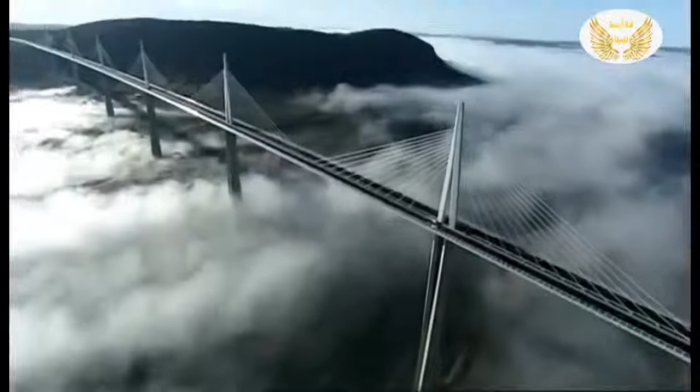And the result certainly pleases the man who dreamt it all up. To see erected this bridge, which I imagined 15 years ago, it's something magic. This is the longest pure cable stay bridge in the world, the tallest roadway in the world, and of course at 343 meters, it is the tallest bridge ever constructed.